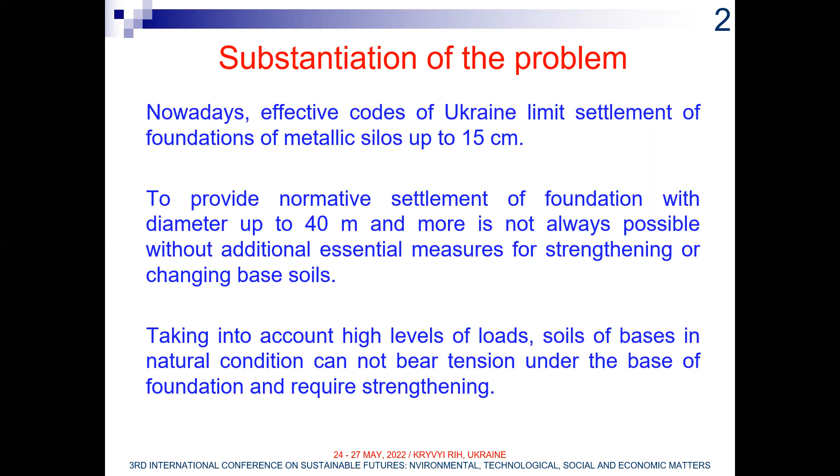So topical is the need of using development sites characterized by complicated geotechnical conditions. Performance of work on change of base soils or installation of soil cushions is not always possible, taking into account underflooding of the area, building development nearby, or other complicating factors.

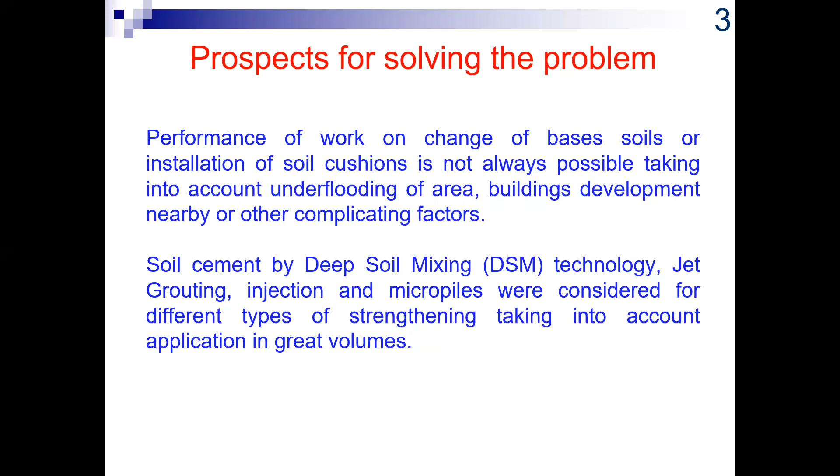Soil cement by deep soil mixing technology, jet grouting, injection and micropiles was considered for different types of strengthening, taking into account application in great volumes. Areas on collapsible, silted or peat soil most frequently belong to building sites that require strengthening. Strengthening of soils in areas with a high level of groundwater requires water lowering to the level of the designed foundation pit. Figure first.

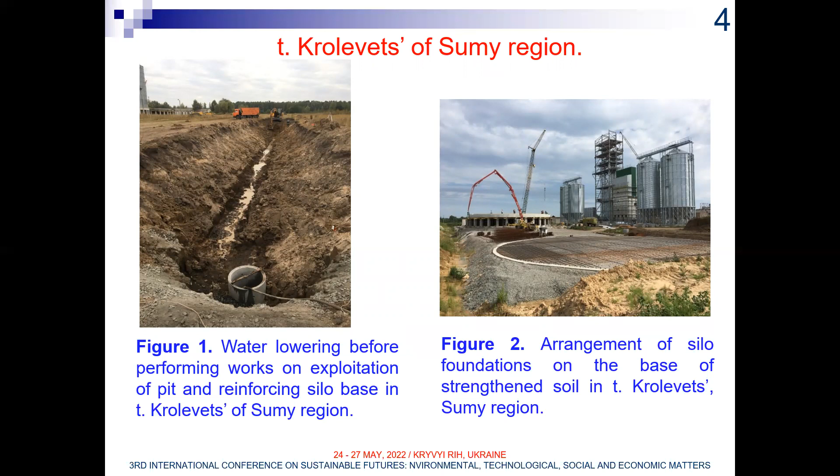Strengthening of base is meant as improvement of physical mechanical properties of soil mass by arrangement of stronger and more rigid elements that work in common with soil, but are not connected structurally to the foundation. The damper layer is shown in figure 4.

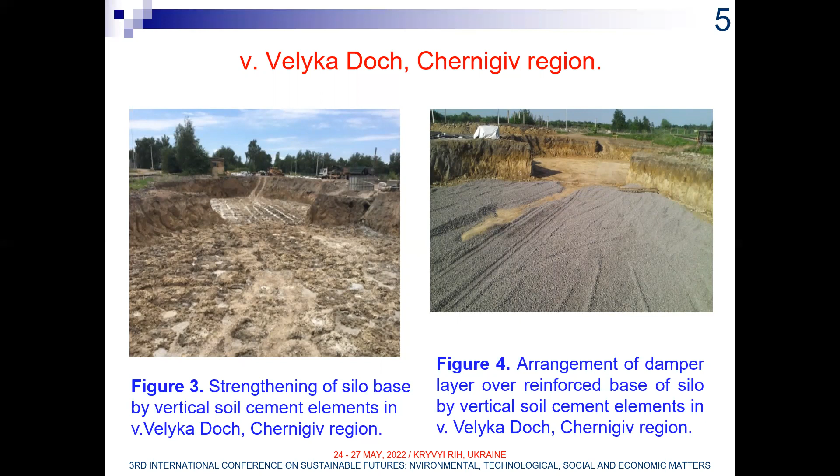The soil replacement method with the creation of a soil cushion and the pile foundation are classic methods of foundation construction. But the soil cushion method is popular on more or less solid bases, as shown in figure 5. Otherwise, it becomes necessary to use bored or rammed piles or elements of precast concrete piles to achieve the depth of the bearing layer of soil. Under such conditions, the construction time and cost increase significantly. Figure 6 shows a precast concrete pile 14 meters long.

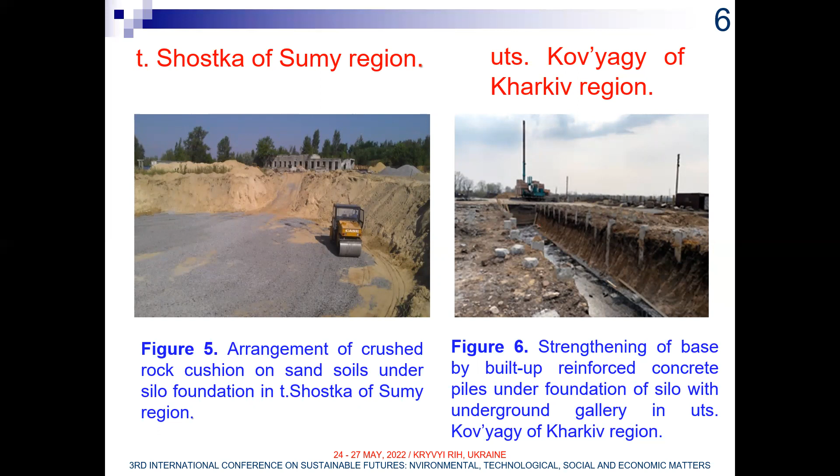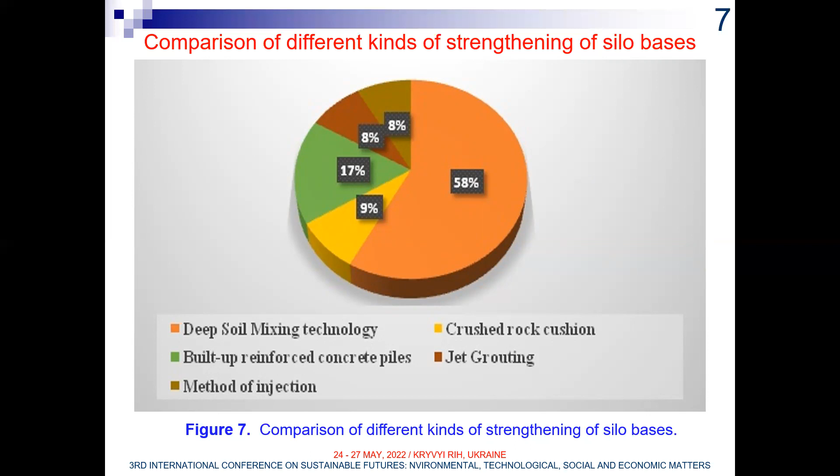The diagram shows the distribution of various types of base strengthening. The deep soil mixing technology is the most popular. Classical pile foundation technology is in second place in popularity. Indicator of material consumption by length of elements, depth of reinforcement: specific material consumption of strengthening per unit length of strengthening element. This indicator is on average 10 units for deep soil mixing technology and about 2 units for precast concrete pile.

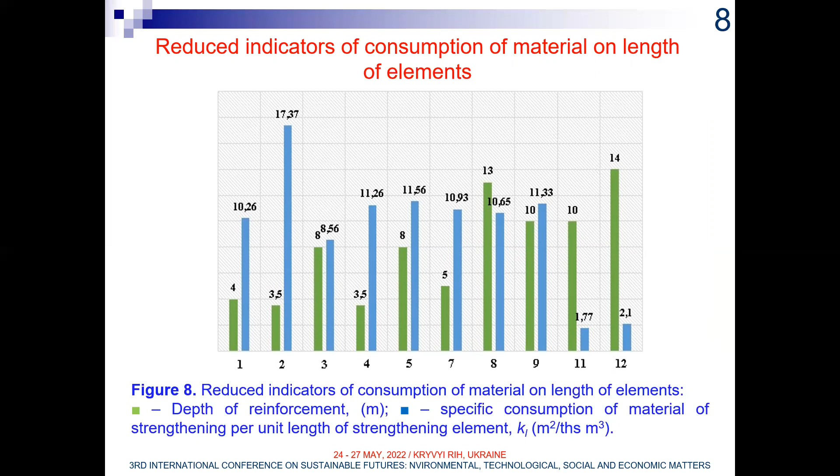We analyzed the parameters of soil cement consumption for silos with diameters from 22 to 28 meters. The average indicator is within 10 units and about 2 units for precast concrete pile. I draw your attention to the sharp jump in the indicator for position 2 due to the use of a small diameter silo. Therefore, the indicator is not typical. As for silos for light grain crops and less loaded ones, the consumption parameter has been increased to 11 units, as evidenced by the results presented in object positions 7 and 9.

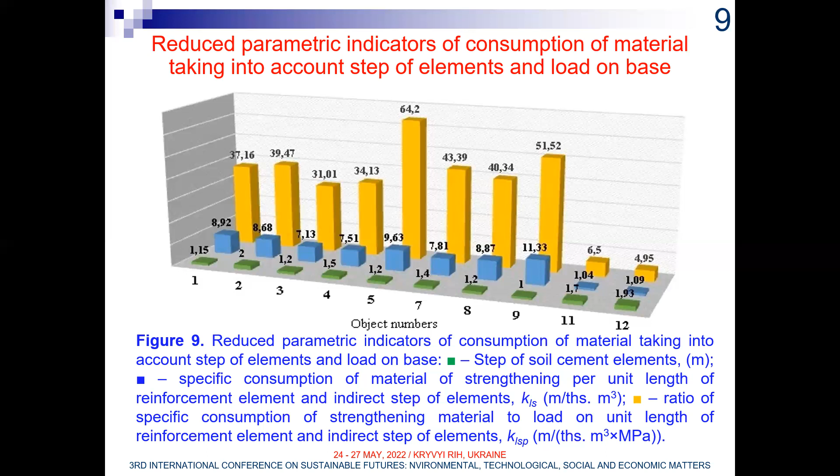The diagram shows the change in the consumption parameters of the base reinforcement material on the volume of stored grain and on the contact stress under the base of the foundation. We have obtained and presented indicators for various construction projects of the consumption of material for soil reinforcement in various geological conditions and various volumes of silos.

Having analyzed the obtained results, it has been determined that soil cement by deep soil mixing technology is the most economically feasible method. Application of jet grouting is justified during strengthening of soil thicknesses locally separated by depth. Injection and micropiles are used appropriately only in conditions of reconstruction under the absence of direct access to the base.